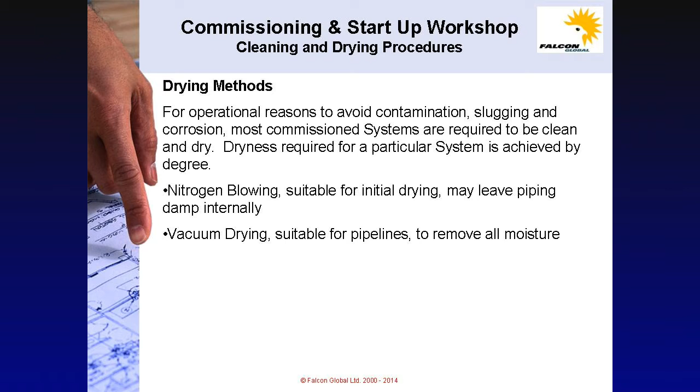For operational reasons, to avoid contamination, slugging and corrosion, most commissioned pipeline systems are required to be clean and dry. Dryness required for a particular system is achieved by degree. Nitrogen, suitable for initial drying, may leave piping damp internally. Vacuum drying, suitable for pipelines, is used to remove all moisture.

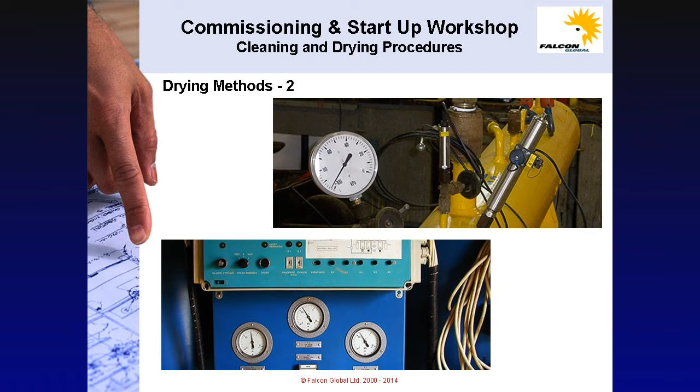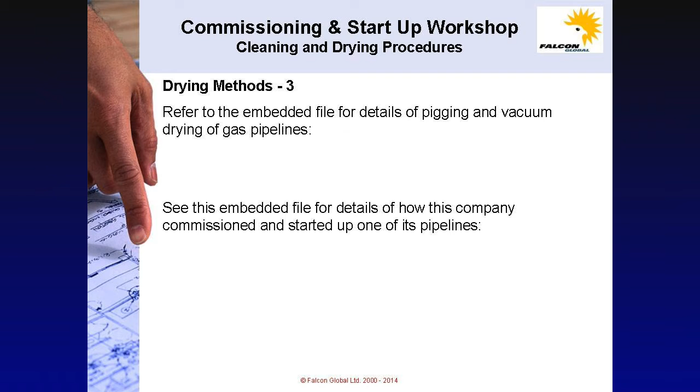Note also on slides 23 to 26 that having dewatered and vacuum dried the pipeline, it was left inert with a nitrogen blanket until ready to go into service and receive gas. Nitrogen has a low dew point and is therefore suitable as the drying medium of choice in colder climates and subsea pipelines. The gas is introduced from a high energy source to remove water slugging and debris in piping and pipeline systems.

Disconnect pipework from all vessels, remove all internals that could cause blockage or obstruction. Place a temporary isolation valve at the exhaust, build the internal pressure and release, removing all debris. It is not to be used for cleaning vessels or tube heat exchangers.

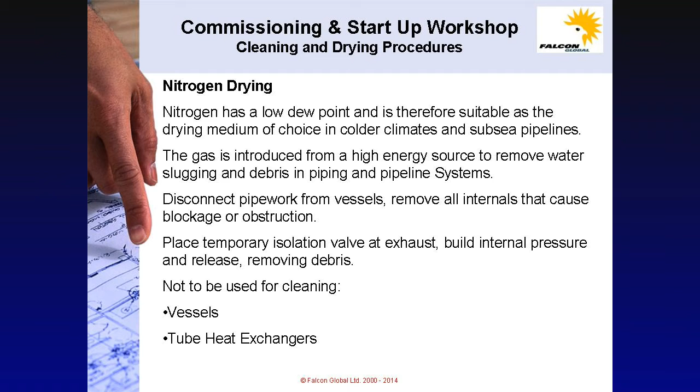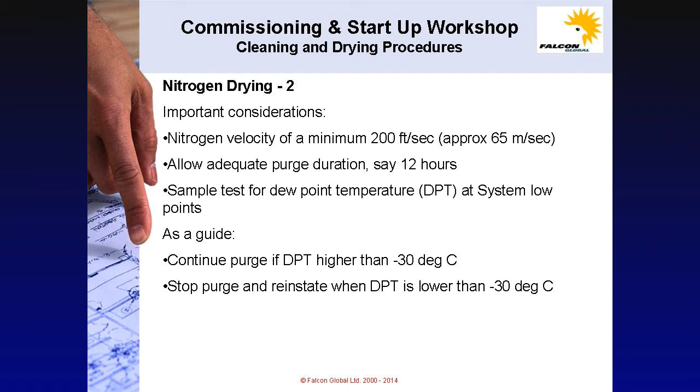Important considerations are to ensure there is an adequate nitrogen velocity with a minimum of 200 feet per second, approximately 65 meters per second. Allow an adequate purge duration of say 12 hours and sample test for dew point temperature, DPT, at system low points. As a guide, continue the purge if the DPT is higher than -30 degrees Celsius. Stop the purge and reinstate when the dew point temperature, DPT, is lower than -30 degrees Celsius.

Advantages. The major advantage is its effectiveness for removal of water debris and with measurable results. The disadvantages, and the major disadvantage, is the cost, particularly in offshore or remote locations where shipment and storage of nitrogen can be very expensive. A specialist contractor will be required with operation by trained users.

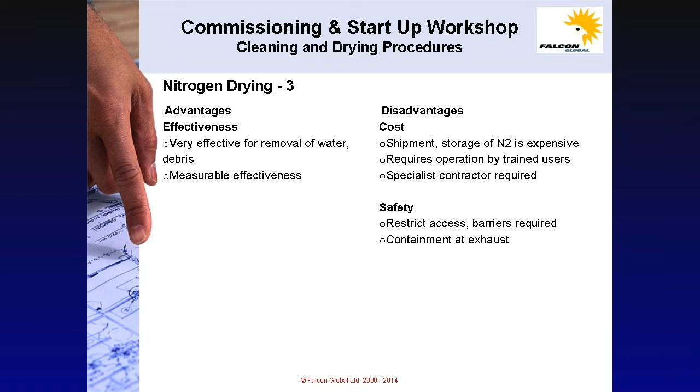Further considerations are safety. Restrict access and place barriers around the system or, as a minimum, for a pipeline at the launch and reception ends. Provide adequate containment at the exhaust. Vacuum drying is particularly effective for piping systems and subsea gas pipelines that have previously been flushed to remove all loose debris, but where no moisture can be tolerated.

After flushing, specifically sized vacuum pumps are introduced by a specialist contractor to remove any remaining water from piping and pipeline systems. All sensitive instrumentation must be removed first.

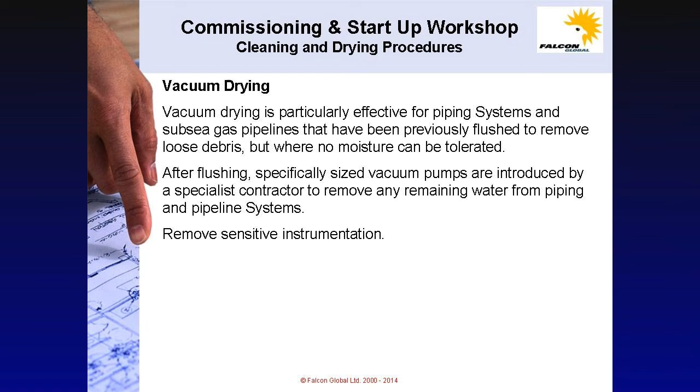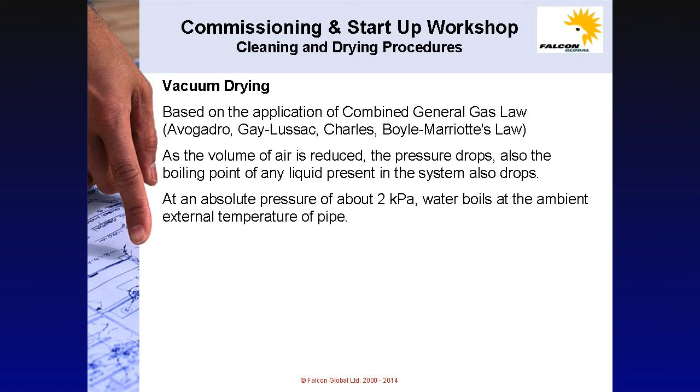Vacuum drying is based on the theory of combined gas law from Avogadro, Gay-Lussac, Charles, Boyle and Mariotte's law. As the volume of air is reduced, the pressure drops. Also, the boiling point of any liquid present in the system also drops. At an absolute pressure of about 2 kilopascals, water boils at the ambient external temperature of the pipe. The vacuum drying process must be followed very carefully.

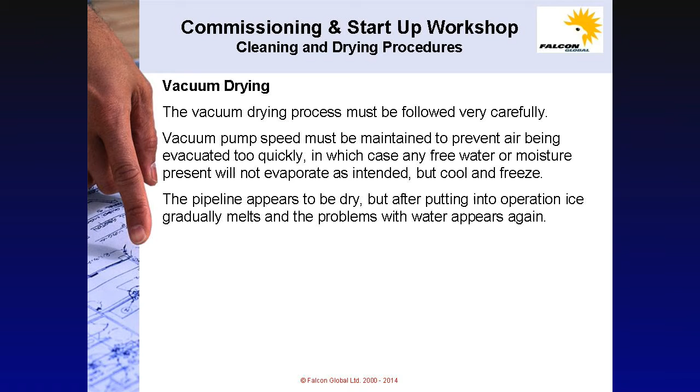Vacuum pump speed must be maintained to prevent air being evacuated too quickly, in which case any free water or moisture present will not evaporate as intended but cool and freeze. The pipeline appears to be dry, but after putting it into operation, ice gradually melts and problems with water appear again. Therefore, it is necessary to carefully follow the drying process, including controlled dwell time, when vacuum pumping stops, allowing free water to vaporize into the pipe.

Dwell or rest periods are calculated, determined by the internal volume of the pipeline and ambient temperature. Dwell times are designed to prevent the residual free water from freezing. Dwell times significantly prolong the overall drying time. Refer to the graph on slide 216 of a typical vacuum drying operation.

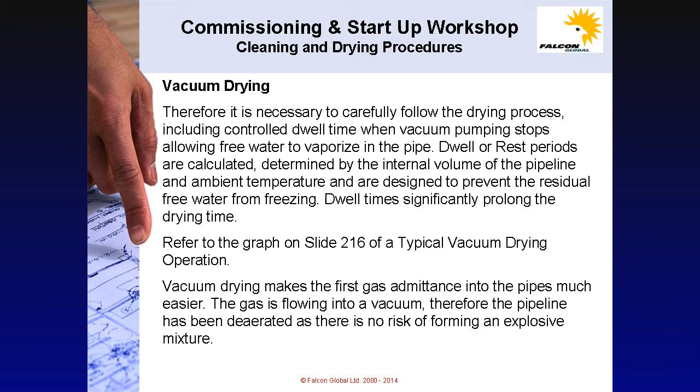Vacuum drying makes the first gas admittance into the pipe much easier. Gas is flowing into a vacuum, the pipe is deaerated and there is no risk of forming an explosive mixture. Slide 216, graph of a typical vacuum drying operation.

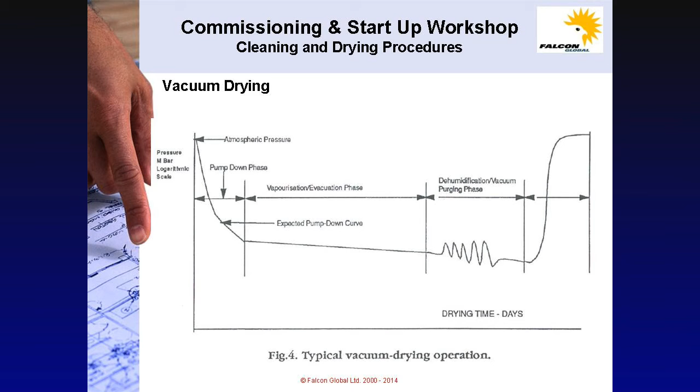After depressurizing, any pressure increase will indicate a leak. Find and seal any leaks before continuing the vacuum test. Monitor the vacuum pump exhaust and oil filter for any emulsion, which would indicate the presence of moisture.

When a vacuum has been pulled, the pump is disconnected and the pressure reading is stable for the duration specified in the test procedure. Release to atmospheric pressure and fill the system with a blanket of nitrogen. Reinstate and proceed with commissioning.

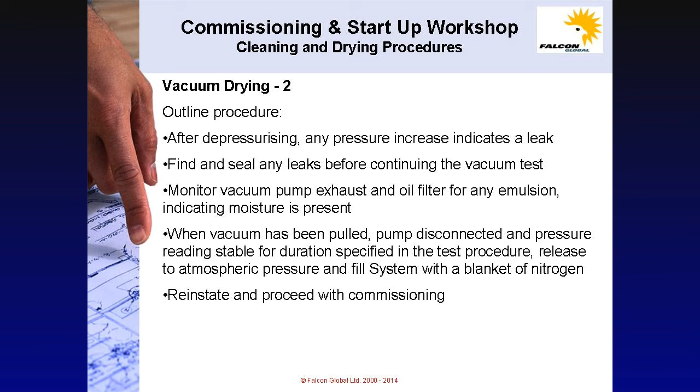The major advantage of vacuum drying is its effectiveness for the absolute removal of water with measurable results, as compared with nitrogen purging, which will obtain a relative degree of dryness. The disadvantages are principally its cost. It is extremely slow, with durations usually measured in weeks.

A specialist contractor and equipment will be required, with operation by trained users. The safety considerations are to restrict access with barriers required. Install containment at the exhaust.

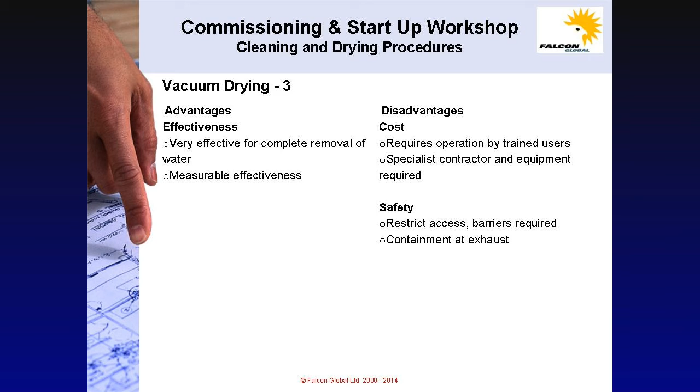Use or modify the A and B check sheets supplied with Zenator to record, track and report progress in the sequence of activities to achieve the internal cleanliness and dryness of tubing, piping and vessels. New check sheets or commissioning procedures should be rendered compatible with Zenator.

Referencing the project's new check sheets or commissioning procedures within Zenator will enable the tracking, controlling and reporting of progress, all intermediate and impacting activities such as punch listing and management of change.

For a reliable audit trail, use or modify the isolations with isolations removed feature in Zenator to record, track and report the removal of internals or installation of spools for temporary purposes. Make sure you attach scanned copies of the marked up piping isometrics and P&IDs in Zenator.

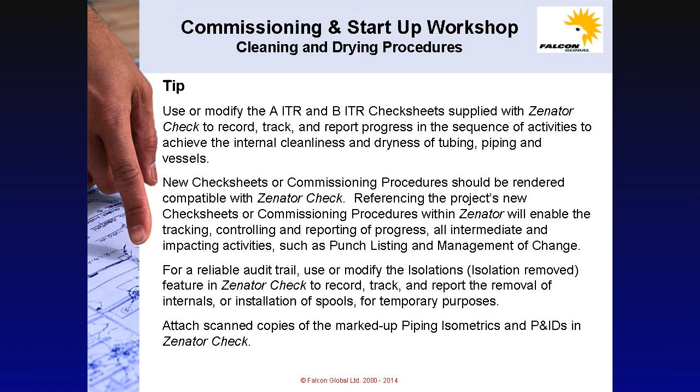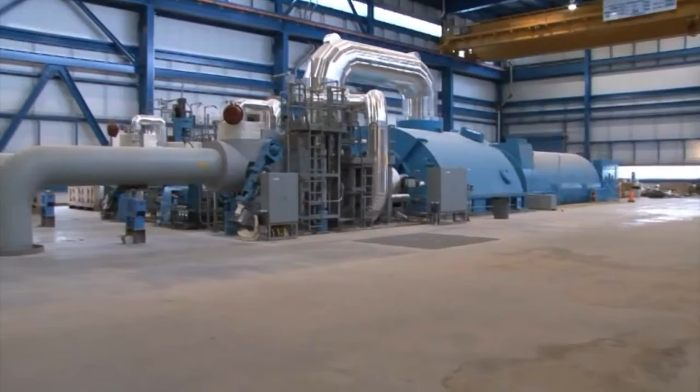The scrubber at the Dry Fork station is unique. It's the largest reflux circulating fluid bed scrubber in America, volume-wise. There are smaller power plants that use a similar scrubber, but the one at Dry Fork station is much bigger. It's a design by Graf-Wulff, a company based in Germany.

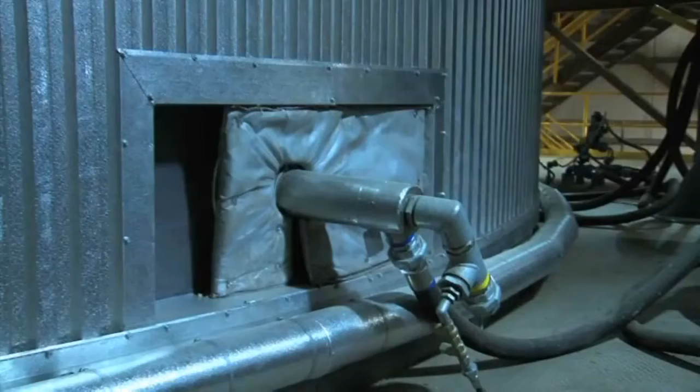Our permits for this project are pretty stringent, and they were able to prove when we were negotiating with them or during the design phase that they can meet our permit levels. Not only has the scrubber been proven to meet very strict air permits, it does it with less water than the scrubbers at most power plants.

You look around Gillette, you notice we're not a water-rich area. And so any time that we can reduce that water use is a huge plus for us. The same reason we use an air-cooled condenser instead of a conventional condenser.

Nolan Bray and Jim Lund are Basin Electric engineers in charge of getting the scrubber up and running. Graf-Wulff has been here the whole time to walk us through this process, and I feel very confident this scrubber will perform just like they said it's going to perform.

This is how the scrubber works. We take the flue gas coming from the boiler in 2 streams. It combines into the bottom of the absorber vessel. It goes through 7 Venturi nozzles which straighten out the flow. After it enters a Venturi, it actually accelerates. And the acceleration is due primarily because we want to establish the circulating fluidized bed of lime and ash.

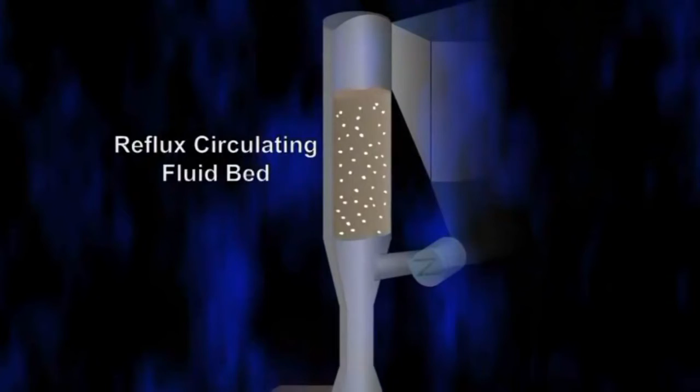The bed of lime and ash isn't a solid mass at the bottom of the scrubber. It's a floating mass of lime and ash, and it works sort of like a filter. We accelerate that flue gas so that it has enough oomph to keep this bed floating. The scrubber is 200 feet tall. The bed is between 50 to 70 feet tall.

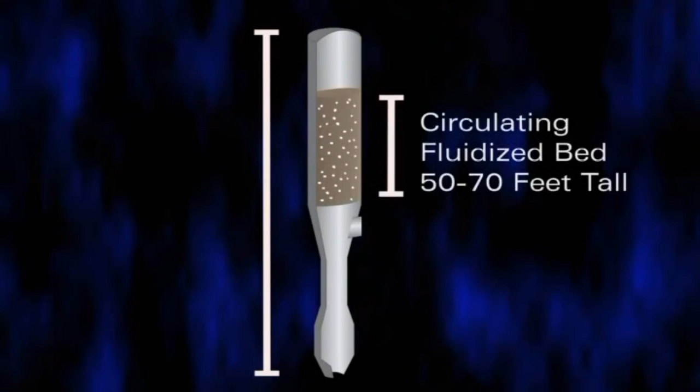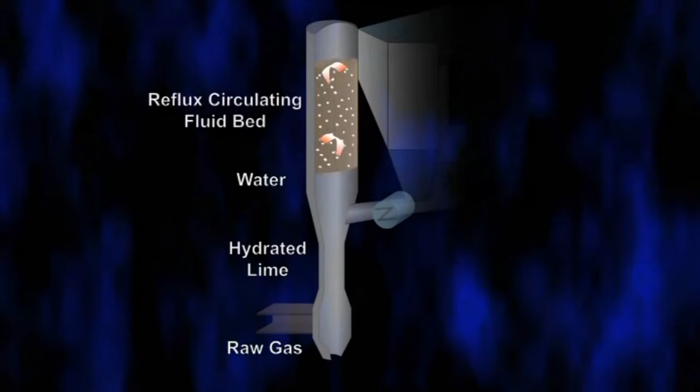The whole idea of the bed is it gives it a place for the reaction to happen. The bed is where the sulfur dioxide is captured. It's the calcium in the lime that captures the sulfur. More hydrated lime is added when needed. We add just enough water to increase the surface area of the calcium for improved sulfur capture, but it's still a drier product.

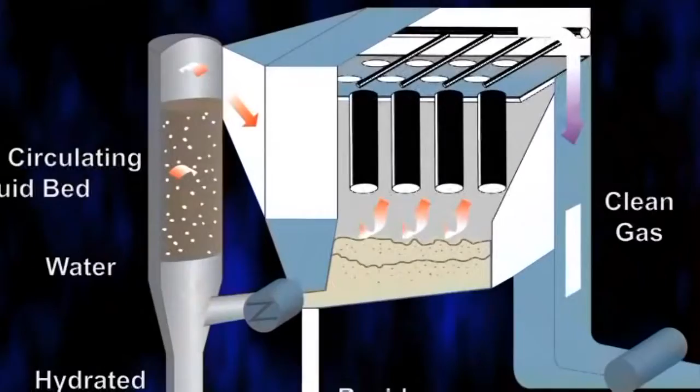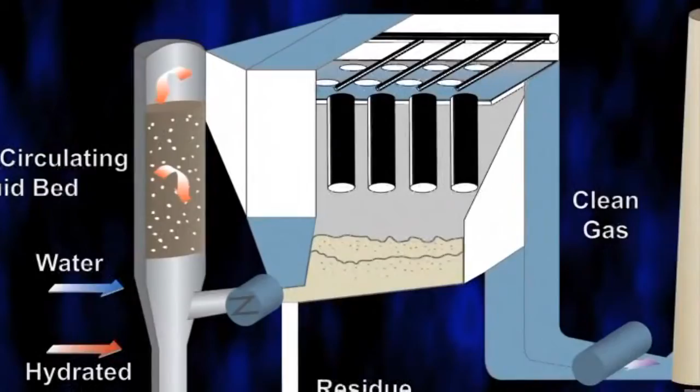The gas moves from the scrubber to the bag house, where 15,500 bags capture ash, drop it into hoppers, and then route the ash back to the scrubber where it can be used in the bed again. The system must work flawlessly before any coal is burned at Dry Fork Station.

The milestone that we're looking for is to be able to establish a bed, have it operate at that set point, so that we can say, let's introduce coal, let's introduce flue gas, because we know that we can handle that.